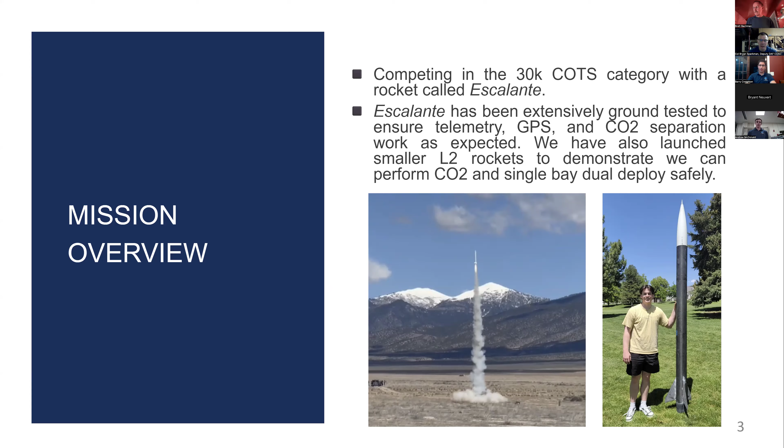It happens. So a little bit of the rocket - here's a first picture of it. This is Escalante, just got it vinyl wrapped the other day. We're really proud of how it looks. Looks good. Yeah.

So we have a 6-inch airframe, we have 3 fins, each fin has a semi-span of 6.4 inches, which gives it a fin caliber of a little bit over 1, it's like 1.08. The tip chord is 2.2 inches, the root chord is 12 inches. The total vehicle length is 119. Vehicle weight is 32. Propellant weight, since we're using an O5500, is 21.6. Our full takeoff weight will be 76.5 pounds, give or take, that's what we're predicting. Pretty good. Yeah, we're happy with that.

Some basic simulation stats for you: our minimal static margin during flight is 1.63 caliber. We currently in Open Rocket have a projected apogee of 31,211 feet. We plan to bring that down with weights, and depending on wind and other weather conditions, that's obviously expected to fluctuate. Our velocity off the rod is 138 feet per second, with a max velocity of just over 2,000 feet per second, or about Mach 1.8.

Our deployment velocity of the drogue is about 95 feet per second at apogee according to Open Rocket, and we have a ground hit velocity of around 21 feet per second. The thrust weight ratio of the rocket at peak thrust is 16:1, with a maximum acceleration at that point of 24.4 Gs. Motor configuration is an O5500X-PS. Our center of pressure and center of gravity are separated by about 10 inches, and this is from the nose cone tip.

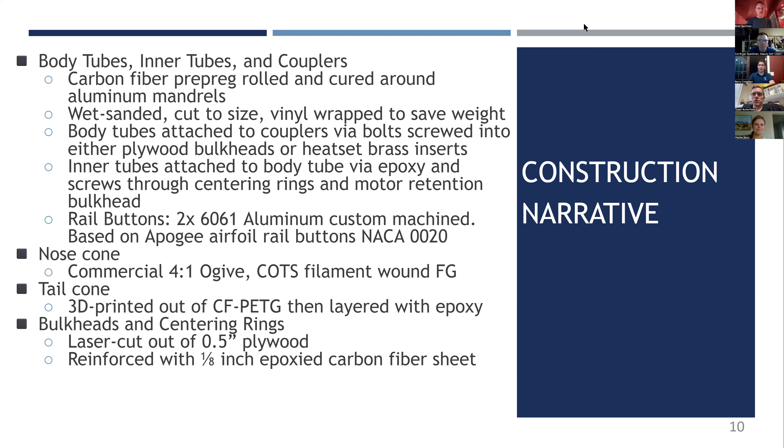Okay, awesome. One concern that we had, you know that we do good testing when we can say that we found problems with testing. So we know that our ground testing was good because it didn't work the first time. Because we're using CO2 ejection, we have to be really concerned about the seal that we're getting with our couplers. However, we also want to make sure that our couplers are not too tight so that the CO2 ejection doesn't actually work.

And so we use Kapton tape to make sure that we have a really good fit between our coupler and our outer body tube, so that we don't get any sort of vertical wiggle in the rocket while it's on the launch rail, which would affect our flight path. But also the surface finish of the tape, and also its more heat resistant properties, make sure that we don't get any sticking between the tape and the outer airframe.

Additionally, we had holes that naturally just have to happen because of the way our AV bay was constructed. And we're using Loctite blue tacky tape, which is our more official version of Play-Doh, in order to make sure that we don't have any air leakage through those holes that the wires come through.

And finally, we have an O-ring that's mounted on a 3D print that's epoxied into the inside of the parachute bay that the AV bay sits right against so that we don't get any leaking between the coupler and the main airframe. So this has worked with our numerous rounds of ground testing, and the reason we've done numerous rounds of ground testing is because this was a concern point, but we were able to find a solution to make sure that our parachutes deploy consistently.

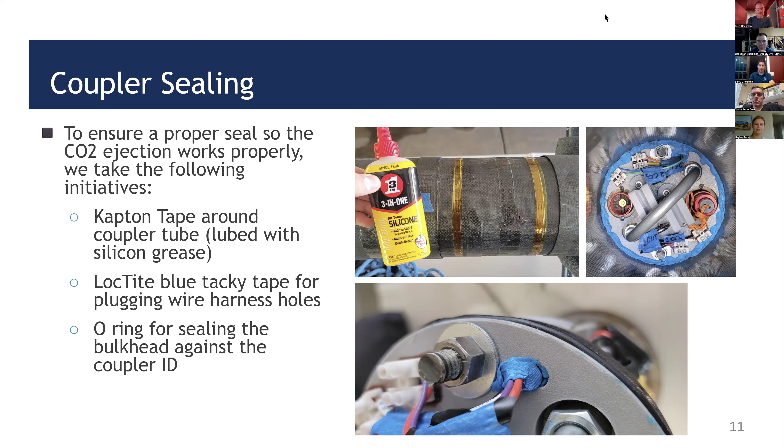Roger that. Okay. Yeah, I'm good with it. We had multiple conversations on email about this, so okay. I'm good. Cool. So you can go to the next slide. Or it might just be lagging. Okay, perfect. Sorry, it might be lagging on my end.

Fin attachment. So because this is our first time as a club going supersonic, we were concerned about fin flutter this year. We were also trying to make sure that we had thin fins to allow us to reduce drag. So the way that we manufacture our fins is we did a carbon fiber layup, just flat pre-preg, and then we cut those to shape. And then we used a table saw and a beveling jig to cut an 8-degree bevel from the edges.

I'm really sad that we don't have a picture. I mean, it's not useful. It looked really pretty. Side notes, not needed.

But so we were able to get that 8-degree bevel. Ideally we wanted, oh my goodness, I'm so sorry, I need to stop working 9-hour days. The shape. We wanted it to be a more curved shape, but we weren't able to find a way to manufacture that. So our 8-degree bevel was the best way we could kind of reduce the drag on our fins while still keeping its structural integrity in terms of manufacturing methods.

We then, in order to attach the fins, epoxied them to the inner tube. We had a 3D printed fin jig to fit our exact dimensions of our inner tube and our fins in order to make sure that our fins were perpendicular or normal, I guess, to the outer airframe.

And then once we epoxied it to the inner tube, we then did a tip-to-tip fiberglass layup onto the inner tube. Typically tip-to-tip layups are done on the outer body tube, but we were trying to do it on the inner body tube just so we don't have any problems with outer surface finish on our rocket.

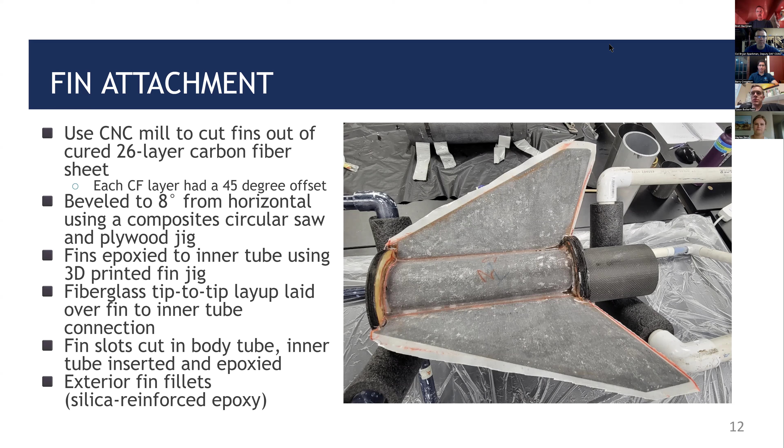Oh, it's thrust plate and then it goes to fin flutter. Okay, perfect. I can do thrust plate. I do know this one.

Okay, so our thrust plate, as I was saying earlier, our motor is huge. It scares me a little bit. And so we did not want to have to do our normal thrust transfer method of just a bulkhead. And so in order to try to make it so all of our thrust is transferred through surface-to-surface contacts, instead of epoxied contacts, we are using a thrust plate this year.

However, we still did want a tail cone because we have found in the past that one, it makes our flight path more reliable in simulations, but two, it also just improves our apogee in general because we're able to cut down on drag a lot. And so we have this kind of unusual looking thrust plate. The idea is that on the base, you see your normal thrust plate, and then we kind of extended it so that we can hold the motor a little bit further back from the rocket, allowing us to have a tail cone without the flames getting in the way of the tail cone, but also allowing the tail cone to not need to be a structural piece, as all of the thrust is initially transferred directly to that first carbon fiber airframe piece.

We have done extensive FEA on our thrust plate to make sure that we are good. Safety factor is 1.74. And it is attached to the rocket using three M4 bolts. These will screw into inserts in the plywood centering ring at the base of the rocket.

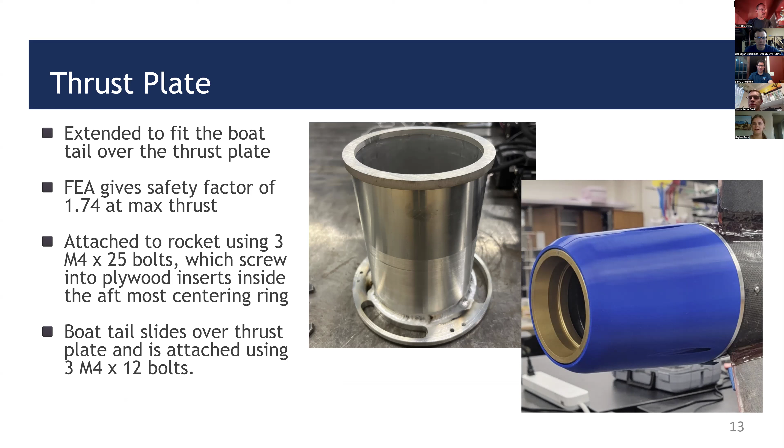Any questions there? No, looks good. Perfect. Next slide, Barry. Okay, perfect. And I'm going to turn this over to Tyson. This is his area of expertise. Okay, perfect. Thank you.

We verified everything. We used MATLAB. We got beautiful pictures of all of the modes of frequency for both torsional and bending. And we calculated a max fin flutter of about 4,300 feet per second, which is more than double what our predicted max velocity is. So we are very confident that we will not have any fluttering on this flight, and we are very excited for that.

Yeah, I'm good with this. We had multiple rounds of back and forth of talking about fin flutter and the fin design, and what I'm seeing here, and based on our conversation, I don't have any concerns. Okay, perfect. Thank you.

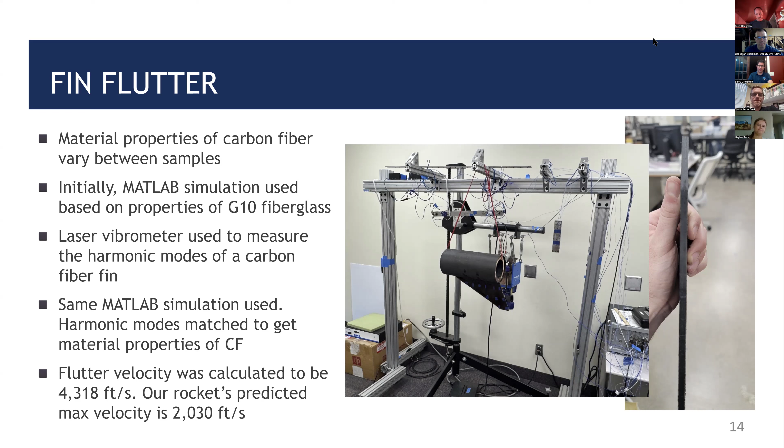Okay, perfect. I can jump back in here. So our counterweight system, what's helped us in the past to be able to nail our apogee, is to be able to adjust the weight of our rocket day of launch based on weather conditions. In the past we've had a coupler dedicated solely to the counterweights. However, this year, because we were trying to shorten our rocket, we've integrated our counterweight into our motor mount tube. And so our counterweights are located directly at the center of mass of the rocket so that we can add weight without having to worry about rebalancing the rocket with additional weight in the nose cone, which is what we've done in years past.

And we have a kind of centering ring coupler situation epoxied into the rocket. So the airframe already has to detach right around where the counterweight system is. And then we have donut-shaped weights that will slide around the inner tube and go inside of our outer airframe that we can then tighten onto threaded rods for this counterweight system. Each plate weighs about 3 pounds. So we have a little bit of lower resolution in terms of the weight that we can adjust. But we also have a decent amount of space on those threaded rods, so we'll adjust the weight more as needed, just using nuts added to that.

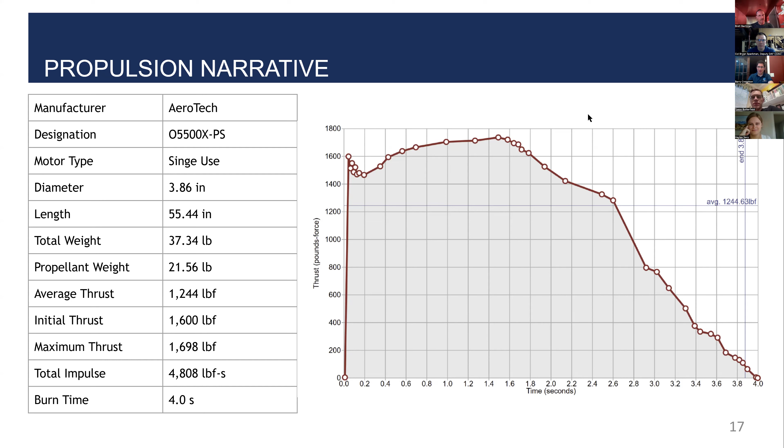Yep. Just to finish on motor, what igniters are you guys planning? I forgot to ask you this earlier. So I purchased two Wildman igniters. Cool. And are you using sticks or are you going to put them on the cardboard too? Plan is just to use sticks. So you're bringing sticks, or do you want me to give you some? You can bring sticks. I'll just get some wooden dowels. Yeah, 1/8 inch dowels, 48 inch. Okay, cool. Tape them once every foot. Yeah, I only bought two. But that's great. All you need is two.

Talk a bit about arming electronics here. Don't have any pictures. We have the electronics there in person though, so if you want to look at it later, we totally can. We're using two altimeters, both of which are Blue Ravens. They're each connected to their own limit switch for activation. Each one is also separately connected to its own CO2 deployment system and paracord cutter system, along with its own battery pack. We plan to use 35-gram CO2 charges, and Bryant will talk more about the specifics of the systems when we get to the avionics bay.

Yeah, I read your report. You said you're using a 23 as the primary and the backup is 35 or something like that? Yeah, we decided to just go to two 35s. Okay. And then for the GPS, we're using Featherweight GPS as our primary. We have a SRAD through a Pixhawk as our secondary, both of which will share the same battery due to weight concerns we had of hitting our apogee.

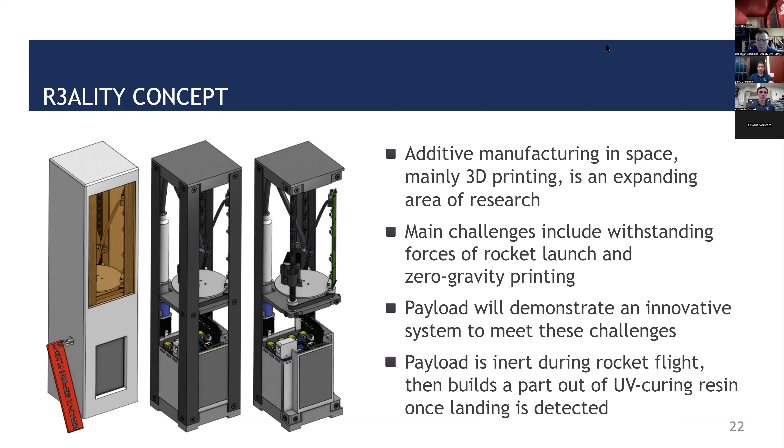Okay. Next slide. All right. Yeah, so this is kind of just walking through how the payload will work. We'll run through a pull pin, which will be attached once the rocket is on the pad. Once the rocket is ready and all the other pull pins are pulled, it will also be pulled. That will keep it off, but with that microcontroller on to detect when launch has occurred, so that it can detect when landing has occurred. And then once the rocket is landed, it will execute a print job while awaiting recovery.

And then once the rocket is landed and recovered, the print should be complete and the part can be removed, demonstrating its robust 3D printing capabilities in any orientation. We'll see if it survives the O5500. Yeah, we definitely put a lot of thought into that, especially using the information collected from previous tests. Some of the parts were slightly damaged last year, and all the parts we made this year were designed with those specs in mind.

For example, the base plate, which I left on the other side of the table. But it's actually not the motor that's going to get it. It's probably the main opening. It's actually the single most significant G load event during the entire flight, the main opening. Oh yes, the sudden tug there. Yes, for the base plate we ran simulations. It's using just a single bolt attached through a bulkhead, and we believe had a safety factor around 2.5 for the loads expected on that pull through. I don't know if 2.5 is an exact number. I wasn't running those simulations.

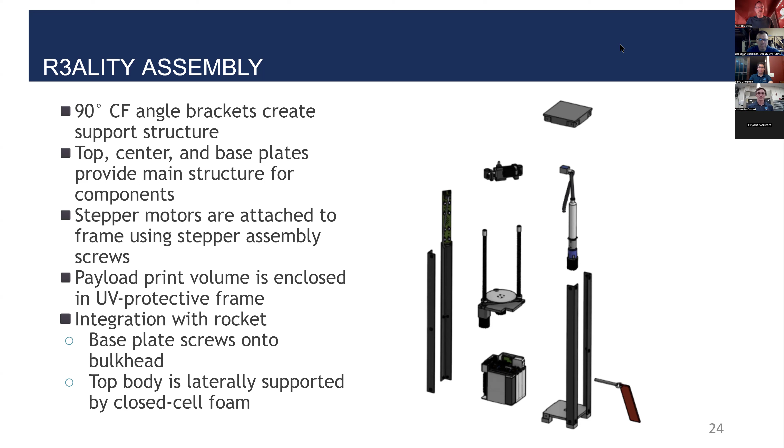All right, recovery - Bryant, we'll switch it over to you now. Bryant is our GNC team lead who has been doing a lot of the leading the charge on using CO2 and single bay dual deploy, using a lot of systems we've never touched before. I think he's done a lot of great work here.

Cool, thanks Barry, I'm ready. So first of all, just want to reiterate that we are doing dual deployment from a single bay. This is something we haven't done before, so we've done a lot of testing, a couple test flights to ensure we're actually able to do this. We've gotten a lot of help from Brett, trying to figure out the finer details of everything we're going through here. Yeah, I saw your video, it looked good. Okay, great, thank you.

So we have a 96-inch main parachute. It's an elliptical shape, so coefficient of drag of 2.2 lets us have a much lighter parachute for much greater drag, which is great. And then we have a 36-inch drogue that's going to deploy at apogee.

Okay, yeah, we talked about this multiple times over email. Perfect, I'm good with it.

Cool, this is a picture you'll see on the next slide - there's an exploded view of the avionics bay. So if you want to pick anything apart, we can go to that slide. There's a lot going on here, so I've tried to label everything.

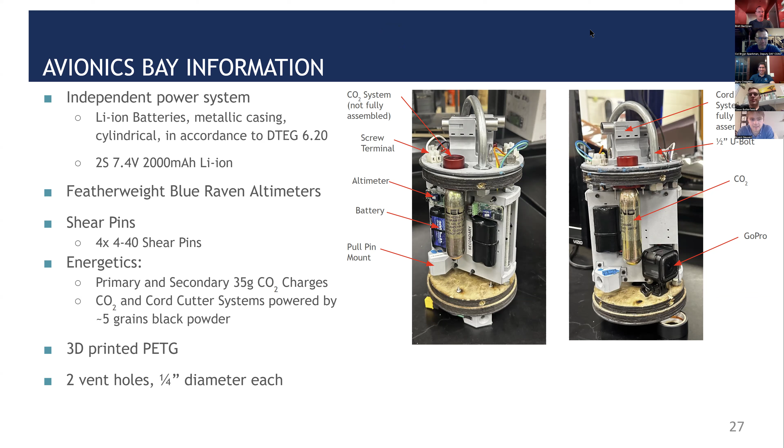So we did a lot of ejection testing. Lots of CO2 charges got burnt this semester, and it was really fun, but it was a lot of money. So we're happy that we did it. We wish we just knew more, but this is for the future club, right?

We had two rockets that we either altered to fit the CO2 and cord cutter ejection system or made from scratch just to test the system. The first one was Escapito. We just wanted to fly it and see if it worked with CO2 and cord cutting. We talked to Brett a lot, and we were successful in launching the rocket. CO2 separated, the cords were cut, but due to an operator error in folding of the parachute, we had tangling of the parachute, and Escapito was damaged beyond recovery. But it showed us a lot, and it showed us that both systems were working. It was just a minor oversight that caused that issue.

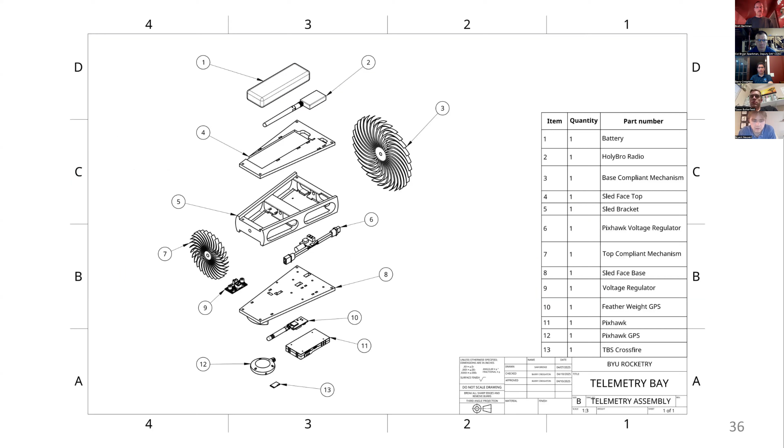The electronics, wires, and a buck converter are on the inside of that plate. And then this is the exploded view of that. I'm good, okay, that's the end of my section.

I don't know if you have any other questions about recovery or anything. Nope, okay. I'll run you really quickly through all the tests we've done, and then we can get straight to the rocket.

Just a quick overview: we've done compression testing on the carbon fiber tubes, compression testing on the carbon fiber angle brackets themselves, a laser vibrometer analysis of the carbon fiber fins for fin flutter analysis, and ground testing for CO2 and cord cutting.

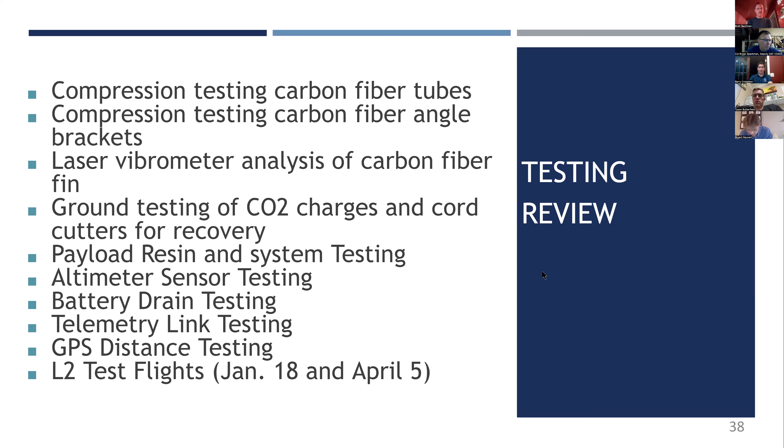All right, I'm good. Cool. And then there's a contact page. That's it, want to get to the rocket?

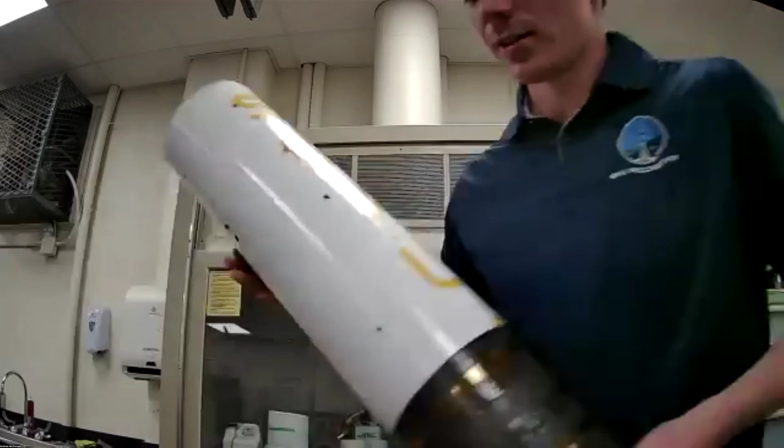Okay. And then show me the points where the bolts go into the airframe. Like these points. Yeah, there you go. Okay, good. There's one. This is the upper body too, and then on the bottom part, it looks like you're good too. So what I've seen teams do in the past is like here's the end of the tube, and then like an eighth of an inch below that is where they put the hole. That's gonna tear through. No, we're not even close to that. Our closest to a seam is like 4.5 inches. Gotcha. Okay.

And then you got the team name and the frequency on the tubes? Labeled, no, we haven't. That's something that we need to do before we go. Okay, don't forget. Team name, but not the frequency. You gotta have both. I think what he's talking about, Andrew, is we're required to label each body tube with the team name, the team number and the frequency. So we just need to get a label maker and put labels on the inside. Because if something separates and another team finds it, they'll bring it back and they know exactly who it belonged to. Yeah. So if you're losing points and they bring it back and it's fine, then you got your points back. All right. Good on the body tubes.

Couplers. What is that made of again? You guys did carbon fiber? Yep. Same process. Couplers are carbon fiber and they're twice as thick as the body tubes just because of fit reasons. Okay. And basically the same method of manufacturing. Those were cured in just a standard oven, not an autoclave, so the vacuum seal was not as good. Otherwise same manufacturing method. Okay. I'm not going to have you guys bang on it and check, but it's basically the same level of stiffness and tightness. Yeah.

Okay, what do the batteries for the GPS unit look like? Let's look at those. Could you pull those batteries back out again? No, he's talking about the avionics for the GPS in the nose cone.

Okay, so there's nothing there. Vertical is what he's looking for. Vertical. So I would do something more vertical, guys. And maybe, if you're just going to use the zip ties, maybe consider using two, because that's a much beefier battery than the others. Yeah, it's pretty heavy. Yep, we can do that.

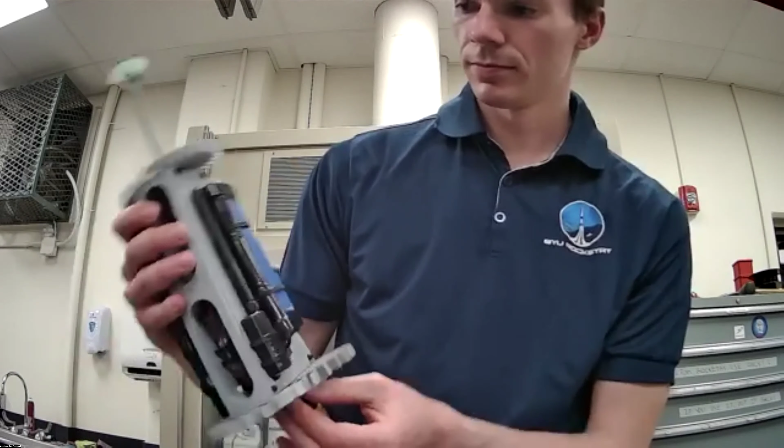So going back to what Brian said, Barry, I think I told you this story earlier, but I had a firmware error that caused my rocket to separate at Mach 4 during thrust, and the nose cone comes out, and then the shock cord stretches down below, and all of a sudden there's an enormous force with the nose cone pointing straight down. And you'd like to find the thing someday. So don't let the batteries escape on you.

You know, put more in there than you ever imagined would happen under normal thrust from the motor, because it's the bad things that you're trying to cover too. Okay. Yep.

All right. So I had a question, Brian, about the banana, kind of how stiff it is, basically. Is there some standard test to check what the stiffness is? I mean, we tend to make rockets that are stiffer than other people's rockets. Our carbon fiber is pretty good and pretty thick, and the couplings are usually pretty good. But is there some kind of standard test, such as clamping it at one end and putting a weight at the other end and seeing how much it bends?